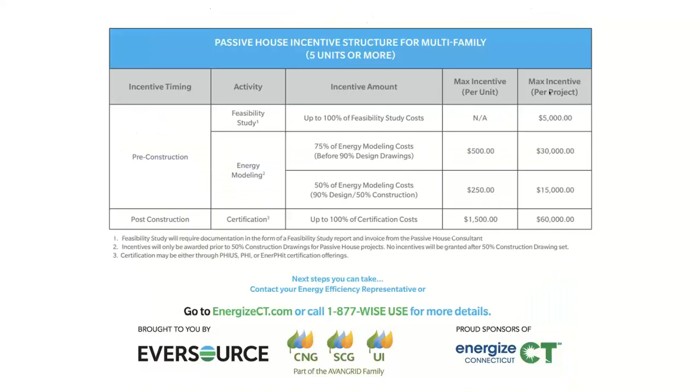Okay, thanks. Was there anything else you wanted to say about these slides, or is this sufficient? No, I think we're good. Yeah, it's all you. Okay.

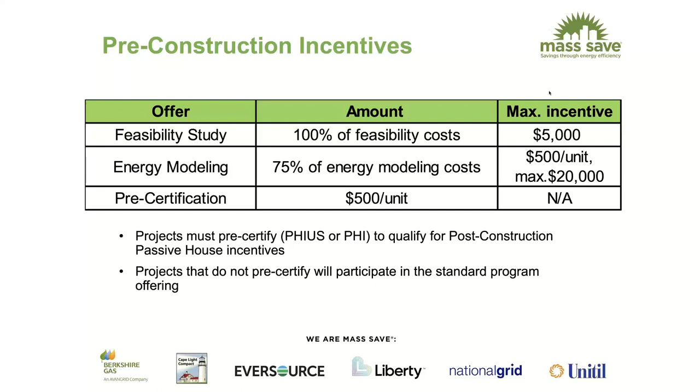All right, very good. I'll let this linger for just a second because these incentives, I have to say, these incentives have been incredible. They've really helped people who were maybe not ready to take the leap and they've covered a lot of the incremental soft cost. It's been a great help to us as practitioners.

So anyway, I'll introduce myself. My name is Michael Hindle, and I am the owner of Passive to Positive. I founded the company in 2010, and if you can see my cursor, this first little single family residence up here was a Living Building Challenge project here in Maryland, where I live. And ever since, we've been pushing forward with deep energy retrofits, new construction, single, multifamily, institutional.

We're a small company. I'm here with Christina Osman, and it's between us and a couple other people working with us. But we've managed to attract some really wonderful projects, and we feel very privileged to have done so. Christina, would you like to introduce yourself?

Hi everyone. So I'm originally from Germany, as you probably can tell from my accent, and growing up in Germany instilled a deep appreciation for environmental stewardship in me. And so that's how Michael and I connected on this deeper level of thinking about the earth and how to preserve it for future generations. And so I'm really happy that I'm working with him and that we are trying to make a positive impact on the planet.

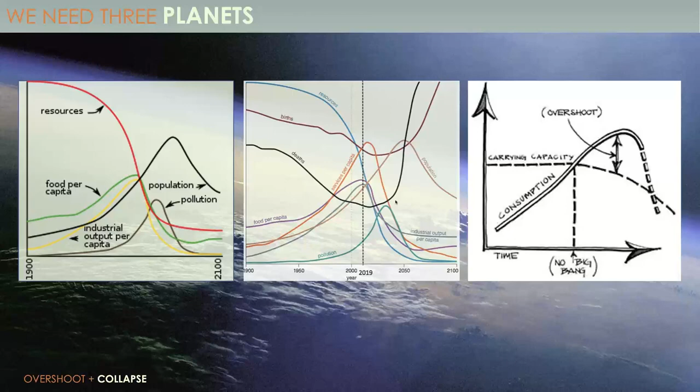Another way of saying this is that we have already overshot the carrying capacity of the planet. There are lots of ways to predict this and graph this, but basically since 1972, with the Limits to Growth from the Club of Rome, there are plenty of models that predict that here in the middle image, we are at 2019, the services per capita and the population are still rising, but so is pollution, and you can see the resources, the blue line in the center, just dropping precipitously. And at a certain point, we extract so many resources that our food per capita, our industrial output, everything collapses, and population collapses. So this is where we already are.

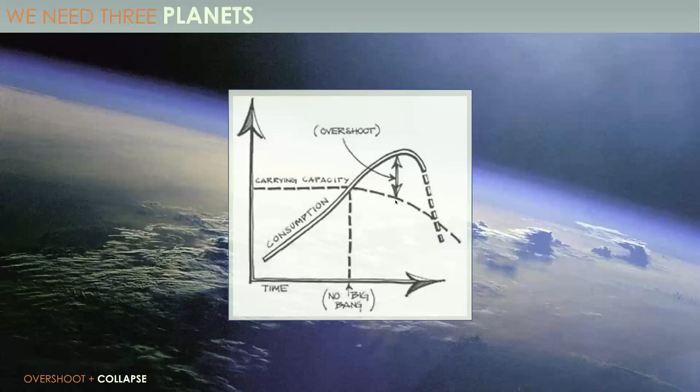The terrifying thing is that if we don't correct course soon, our overshoot can actually degrade regenerative systems that are the default mechanism of the planet to the point where we erode their capacity to rebuild. And if we do that, it would take hundreds, probably thousands, maybe tens of thousands of years for that system to recover and oscillate back into what we now know as the carrying capacity. There's no big bang that shows us that this is happening. It's already happening. In fact, we crossed that threshold in 1980 when I was 10 years old. We've already overshot the capacity of the planet since 1980 by 20%.

And for everyone to live the way we live in North America and Western Europe, you would need 3 planets. And in order to meet the projected population rise and material growth of the next 40 years, we would require 6 to 12 planets. And all the techno-optimism in the world will not compensate for the material limits of this closed loop system. That's a whole other conversation that we could have with Elon Musk and others. But the idea that you can transcend the material limits of a closed loop system like a planet with an atmosphere is just crazy. So we have one atmosphere, one biosphere, one set of physical resources, and each of us here today only has one life to do something about it.

Christina, would you like to talk about this? Sure. I mean, this sounds all doom and gloom. Obviously, we want to look at it also from an optimistic standpoint, of course.

And sustainability really means meeting present needs without impairing future generations' ability to thrive. But that's not good enough. We've done quite a bit of damage. And so really what we need to look at is a regenerative way of being. And that means it has to take into account repairing and regenerating damaged systems, looking at it from a really holistic standpoint.

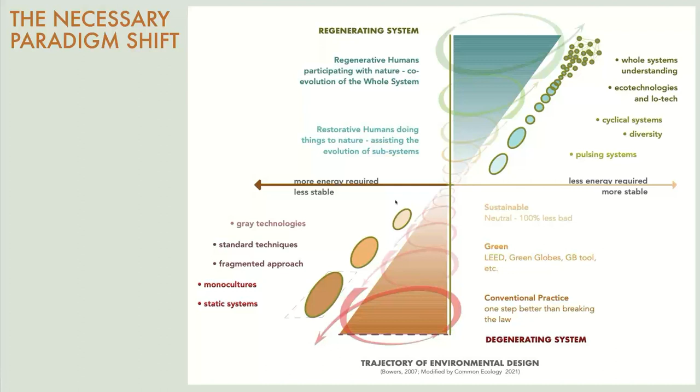So, Christina? Yep. So we want to be looking at a healing system, and really the main focus is conservation first. We want to do no harm and make sure that we reuse and restore the existing fabric, everything that's there already. We want to reuse and restore, and we want to repair the common resources that are available to us.

And it cannot happen without looking at people, at culture. I'm transplanted into a different culture, and so are very many other people, especially with climate change maybe challenging the cultures of different generations. I think it could have total impact. So we need to be aware of that. And we're all part of building design teams. We are the system, and we have to be the change.

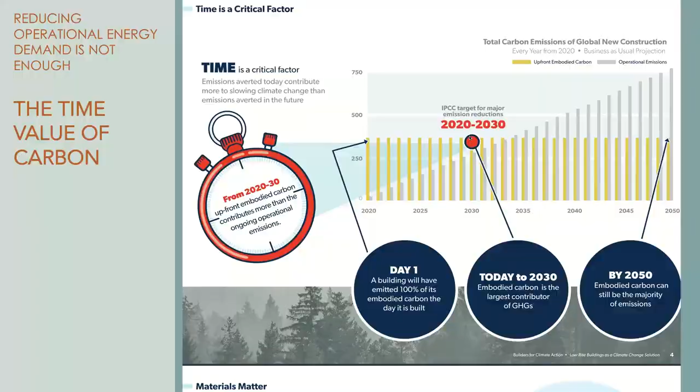But we now know from the scientists studying this that we have an earlier tipping point into runaway climate change than maybe we ever imagined. So if you look at, say, 2030, which is the Intergovernmental Panel on Climate Change target for major reductions, the embodied carbon is still the majority of the total carbon emitted by a building. So if we build now with carbon intensive materials, we are doing a grave disservice to the climate, even if we're zero energy. There are other charts that show a zero energy building with a greater carbon footprint because it uses carbon intensive materials.

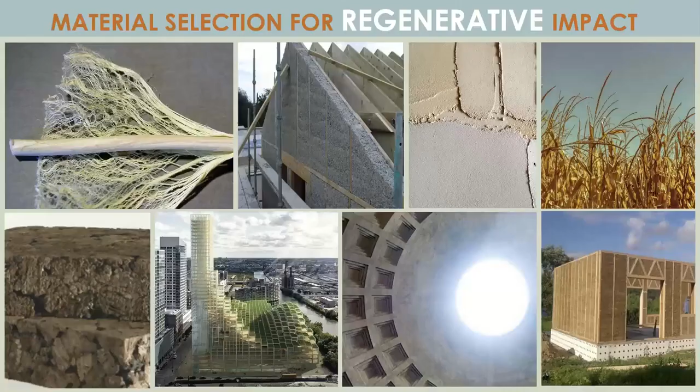They're also beautiful buildings and healthy buildings. So we have to choose materials for their regenerative impact. There are lots now, and there are also materials such as concrete alternatives which use a lot less carbon. So even if the material itself cannot be regenerative, it can dramatically reduce the harm you do, so that your renewable materials can tip the balance towards a climate positive impact.

So we're going to talk about a couple of projects here. The one on the left is North Avenue, workforce housing here in Baltimore. We're working on this with Tim McDonald and Onion Flats Architects. This is 7 different row homes with, I think, 18 units. It's affordable housing with first floor retail, and it was initially planned to be a tear down. Christina is going to talk about this balance between tearing down or building new in a moment.

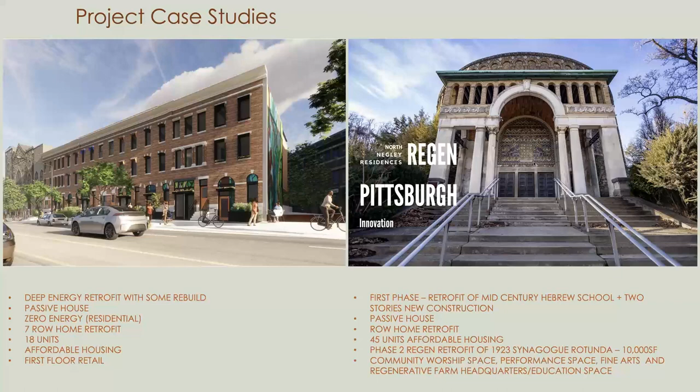The picture on the right is of a 1923 synagogue. It's absolutely gorgeous inside and out, but it's been seriously degraded, unfortunately. This is in Pittsburgh. We are deep energy retrofitting the adjacent Hebrew school and, as a second phase, this synagogue into a community center. It'll have 45 affordable housing units and a 10,000 square foot footprint community space, which will be worship space, performance space, etc. So I will let Christina start now talking about workforce housing.

Yes, so you see here a nice rendering of what it will look like once it's all completed. Basically, as Michael mentioned, there's an existing structure that's there currently—7 existing row homes in varying states of dilapidation. We thought it was really important to figure out if we can save some of the building structure and what the impacts are.

I mean, obviously our main goal is to do passive house. And with passive house, oftentimes the focus is so much on operational energy, right? That's the main goal. With that goal comes also better indoor air quality, resiliency, human comfort—just being in the space is much more nice. And then also, from acoustical values, it's so much quieter, especially in a busy, bustling street like here in Baltimore.

So those considerations are all on one side, but on the other side, you want to also look at: if you put passive house envelopes on projects, oftentimes that is achieved through high embodied carbon impact, in terms of adding so many materials, a lot of foam-based materials. So in our practice, we're really trying to figure out a responsible way of achieving passive house.

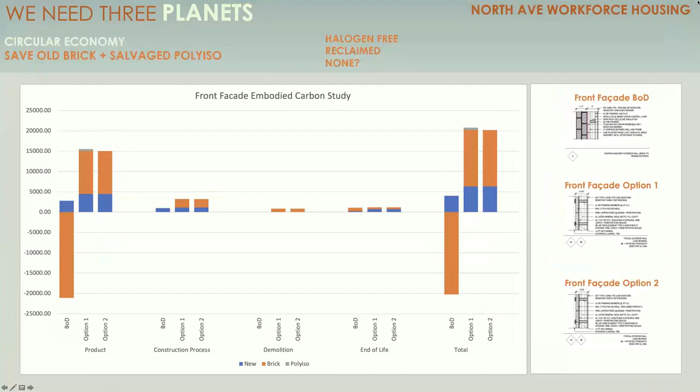These charts, we have several, and they're maybe not the most compelling part of the presentation, so we're not going to spend too much time on them. But it's important to see that there are different phases in the operation of the material. On the left-hand side, your first phase is the extraction of resources, processing, manufacture and transport. The second phase is construction. The third phase actually includes maintenance and operation. And I also included demolition because I think that needs to be considered as well.

That's something I added because I think it's important. If you have a site that already has structures on your lot, you can't just ignore that. So you have a responsibility, and you should, in my opinion, take a carbon penalty if you just tear them down and start from scratch. That's why we added that specific piece here. It's minimal, but yeah.

Can you describe to us what we're looking at here? Yes, of course. So basically, you're looking at the orange color, which is representing the masonry.

We have a baseline here at 0, and then some negative and positive values. So the basis of design shows the big amount of masonry that's already there, compared to the blue amount of the wall, which is the backup wall to make our structure now passive house. By combining the existing structure with the additional new construction, we are achieving an R value of R26.

I also wanted to mention that this was fairly conservative, because this was all modeled in Athena taking into account today's construction methods. At the time when these row homes were constructed, it probably was much more energy intensive to create these bricks, so my negative might be even deeper realistically.

Correct me if I'm wrong, Christina, but we're not actually claiming credit for that. No, we're not claiming credit.

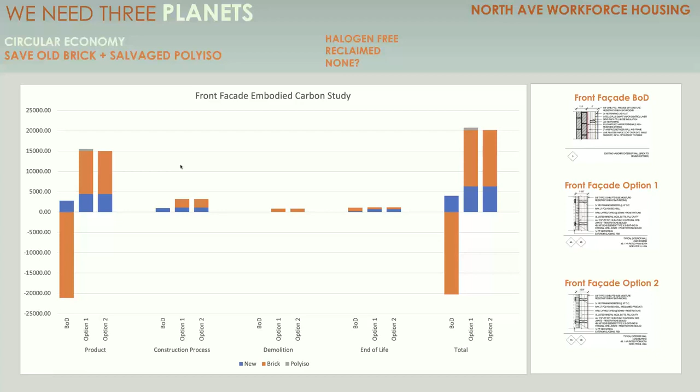I just want to give you a perspective of what it means in terms of having impact, how much carbon is already emitted for that material. We have the responsibility to do something with it, and if we extend the life of it, that makes total sense. So that's basically our message.

I also wanted to mention my passion is really in Living Building Challenge, healthy materials, clear labels, the red list. In this case there are a few options for red list-free polyiso you could use, so if you needed to include it in your project you could still get Living Building Challenge certification - these would be halogen-free polyiso products. But still it would make more sense to use used materials if you can. That's definitely a message I wanted to share. Yes, because I share this passion as well.

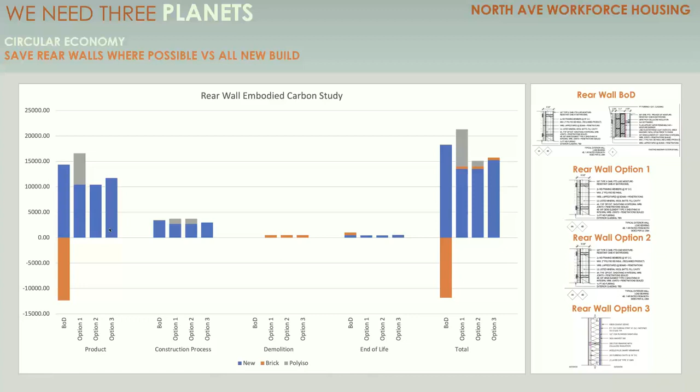So we're not trying to tell you empirical values. These are more like considerations that should really go into decision making. And so that's something that we just wanted to share, thinking about a project in different ways. Christina, I think we might want to skip the party wall one, in the interest of time. Sure. But as Christina mentioned, we're trying to show the big swings, because it's not acceptable to do marginally less carbon intensive projects. We have to push them hard. So if we can see ways to make big differences, that's what we're focusing on.

Okay, so this next project is North Negley Avenue in Pittsburgh. This is the rendering of its eventual self. But it does not include the greenhouse from the salvage windows or the regenerative farm plot in the front yard. That comes in the next phase with the synagogue rehab. In any case, we want to remember that biogenic carbon actually comes first in the form of trees, which keep us cool, reduce heat islands, sequester carbon, and can eventually provide renewable materials. But we have to protect the forest from which that material comes.

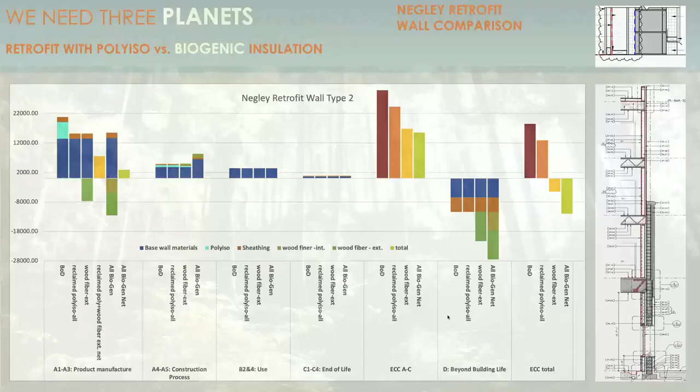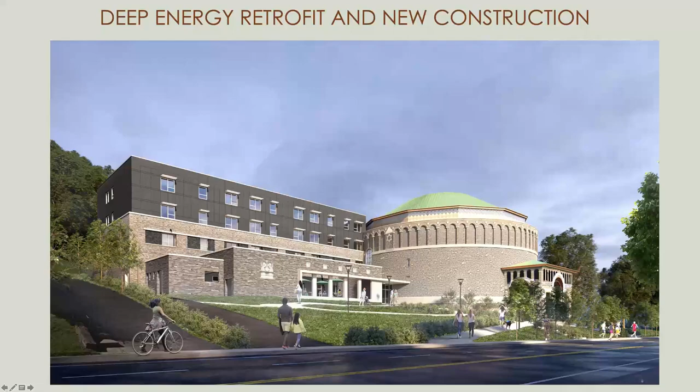In any case, this study is of the retrofit wall, and again, we have all of the cycles. We have the product manufacture, construction process, use, end of life, and eventually beyond building life, and the net total. Those are the different things shown on the chart. The blue wall is this backup frame wall, which is pretty steady and consistent throughout.

But you can see the bright teal blue is polyisocyanurate insulation, which we were required for a couple of different reasons to use. The sheathing is the orange layer. However, we again were able to convince the team to actually save money by using reclaimed polyiso. And so you can see that you eliminate that bright teal blue bar on the top left here.

In the next scenario, after the reclaimed, we decided to try to quantify the carbon impact of using wood fiber instead of polyiso. And it turns out that wood fiber in its manufacture phase actually has a negative carbon impact. In other words, it's been pulling carbon out of the atmosphere for 40, 50 years. And the impact of processing and producing it does not offset the sunk carbon. So it's a negative value here, the green.

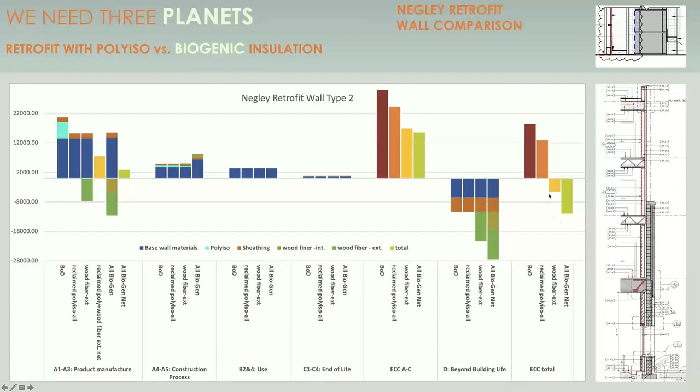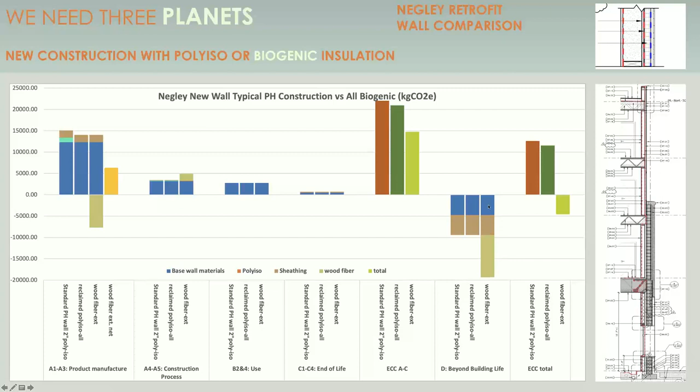However, on the new construction wall, we were able to use wood fiber insulation, and you can see that this beigey green color is the wood fiber insulation. Our net carbon footprint of the material manufacture of these walls is the yellow bar here. There's added carbon for construction and maintenance. But then ultimately, these are our totals, okay? But if you include the circular economy we referred to earlier, the negative carbon storing potential of these materials being reclaimed gets us into the carbon negative realm.

Now that's a lot of talk, and it's a lot of modeling with some pretty inexact tools. I think Christine and I were both a little surprised at how inexact and ineffective these tools could be. So we did a lot of breaking things out to say, well, Athena tells us this, but if we remove that element, what's the numerical value? Could we supplant it with something else? Athena was not flexible enough to do what we needed to do. So I would not consider Athena really that useful a tool other than as part of a process.

But there are other tools like EC3, where you have to have so much data on the materials and the quantities of materials. You basically have to be working from a bill of materials and the total quantities to get a real number. So somewhere in between those two, there needs to be a tool that gives us some more useful values early in the design phase. And we also want this to be for people just making simple, easy decisions, right?

Something that's simple, but you don't have to spend much time, because this is something that we're adding to our practice, but you're not being asked to do this. So it needs to also make sense, to do it fast and efficiently. Yeah, and for years we've been doing foam-free passive houses, and we were doing it based on intuition. We were trying to use biogenic insulation materials or recycled ones like cellulose whenever possible. And that was just our gut feeling that it was the better thing to do. Now that we're doing the analysis, we're finding that that intuition is generally supported.

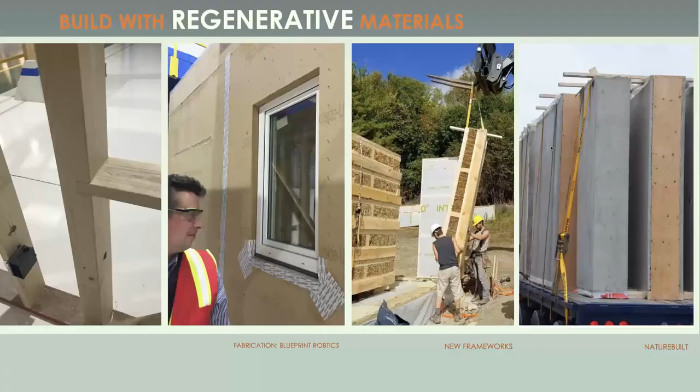But panelization itself, or prefab itself, is really not the solution. We need it to be focused on renewable materials. So the gold standard is to use a rapid growth cycle biogenic source. If you're growing hemp, it grows really fast, pulls carbon down aggressively. If you're growing a tree that is sustainably harvested, it sequesters carbon for 30 to 80 years, and then you cut it down. We don't have 30 to 80 years. So it's better to use a carbon storing material, but it should be regenerative materials that are a rapid growth cycle, if at all possible, in any instance.

Okay, there are a couple other things we want to talk about briefly, and Keegan, what is our time limit here? How much time do you think we have right now? Because we have a couple more things.

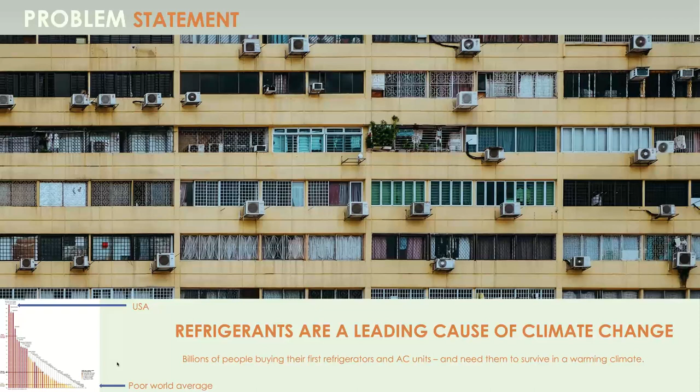If we do everything right, but don't address refrigerants, we're still cooked. So we have to find a way out of this trap of refrigerants. We're going to show you a project in a moment. This is a wonderful project using mass timber, but this is the VRF system. That's a lot of refrigerant. Can you save the planet by using high refrigerant systems? I would posit that we cannot.

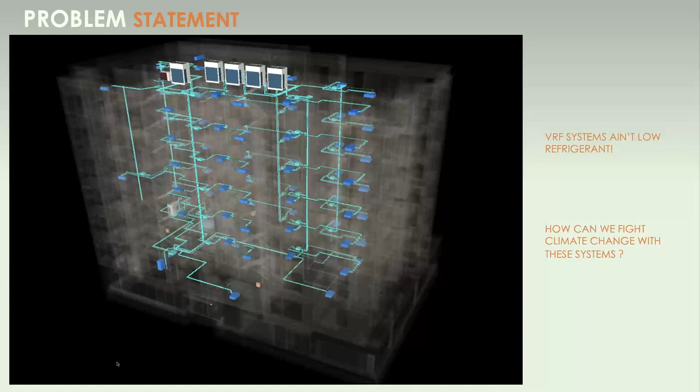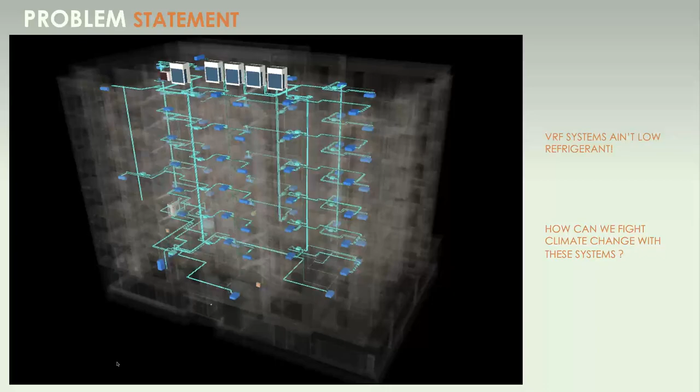And I do so respectfully and with humility, because I know there may be people a lot smarter than I am who could say, actually, on balance, you can. But I'm going to say, since we have to do everything right, we should try to eliminate refrigerant to whatever degree possible.

This Ephoca company, it's relatively new to us, but they have these through-wall PTAC things, which are airtight and very efficient. And they have this VHP, which sits in a soffit, say above a kitchen, and delivers your heating, cooling, ventilation, and dehumidification for an apartment in one unit.

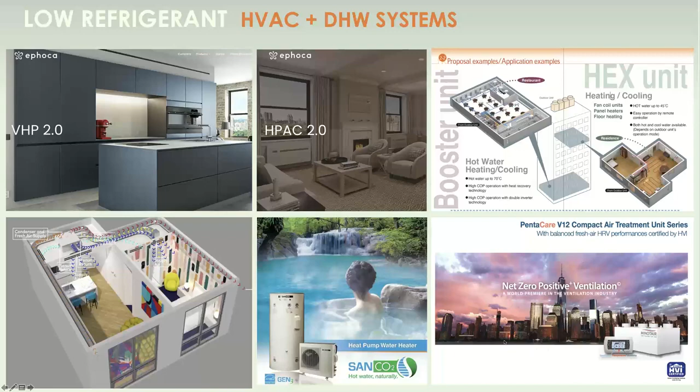We all have probably heard about Minotair down in the bottom right, and Sanden. Sanden is CO2 refrigerant. Minotair has a tiny bit of refrigerant that's packaged in the unit. So basically, we have an option of choosing not just efficiency, but efficiency plus the lowest carbon footprint we can across both assemblies and systems.

All right, the last thing I want to mention, and Christina, please feel free to jump in if you have anything to add to this, we're doing a bunch of projects in Washington, D.C., right down here, Barry Farm. We're completely redeveloping. We're not doing it, of course. POA is, and we're the consultant. A total neighborhood redevelopment, all to Passive House standards, all with solar and backup storage.

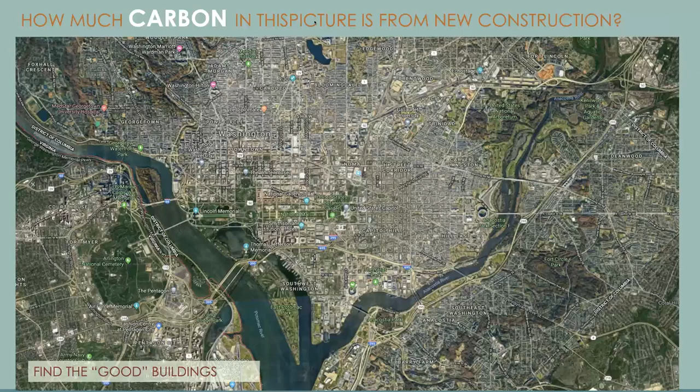It's pretty exciting stuff. But if you look at Washington, D.C., and imagine the plume of carbon dioxide being emitted from buildings in this city, how much of that carbon in this picture is coming from new construction? If we build every single new building to carbon negative standards, Passive House standards, net zero standards, what have we accomplished? Well, we've accomplished a lot, but not enough. You could find the good buildings on this map and there would be a tiny, tiny fraction.

So deep energy retrofits are not optional. They are complicated, but they are not optional. We're going to show you several; both of those projects we showed you are deep energy retrofits. Now, if you look at these charts by Siegel and Strain Architects, they're a big part of this movement, the carbon-sensitive architecture movement.

The chart on the left is emissions sources in millions of tons of carbon emissions equivalent. Operating emissions of new construction is this tiny little bar on the left because we make buildings pretty efficiently now. Embodied emissions of new construction is pretty low, like we're getting better. But the operating emissions of existing buildings dwarfs both of them.

That tells us, if we go over to the CO2 emissions by project type, you can see that large, heavy buildings have a very large carbon footprint for construction. Small, light buildings have a moderate, but still present carbon footprint for construction. But on the right, renovations have the lowest of all.

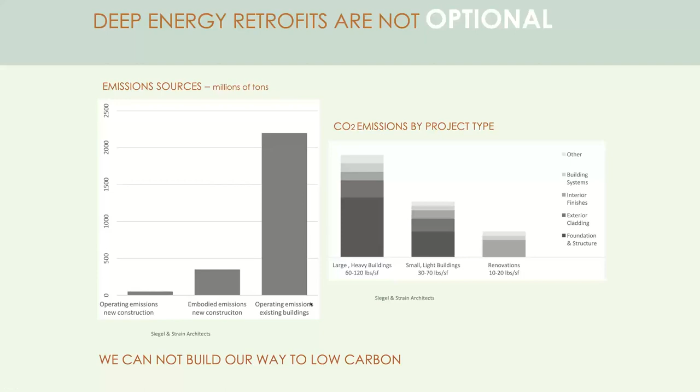What that is telling us is that our problem, the operating emissions over here on the left, is aligning perfectly with the best opportunity. So operating emissions can be dramatically reduced by the lowest carbon footprint kind of project. So this intervention is the lowest carbon footprint and it achieves the greatest result. So we cannot build our way out of climate change with sexy net zero buildings. We have to do retrofits.

Now, thanks to Adam Cohen for sharing this with his integrated project delivery course. This is a chart that just shows time from left to right on the bottom and effectiveness and cost vertically on the left. The blue line is the effectiveness of change, and the green line is the cost of change. And I think we've all heard this. I apologize again for preaching to the choir, but usually the decision-making process in design-bid-build projects is backwards.

Here in this green zone, we would have the greatest effect of making design changes for the lowest cost. But at some point, those lines cross and it becomes more expensive and less effective to make change. And this pink bar is basically when we usually start doing that. And the orange is what we're doing on several projects right now, chasing value engineering savings where it's the most expensive and the least effective to make design changes. So again, this is just the same passive house argument for integrated design teams and integrated project delivery.

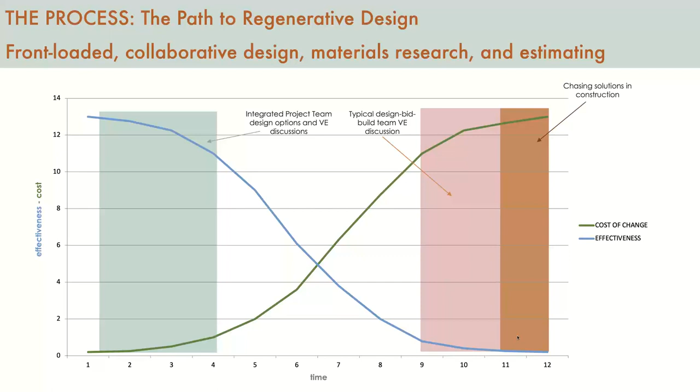Okay, Christina, you want to talk a little bit now? So these are your slides, though. I'm obviously not a white male architect, but I'm an architect.

We hear from the architects all the time, and I'm not bad-mouthing architects. I'm married to one. Yes, we know that. I'm one of them too. But how often have we heard, you don't understand, my clients aren't asking for this, so I'm powerless to do anything. And my answer to that is wrong. You are not powerless. You can play a role in educating and changing the conversation.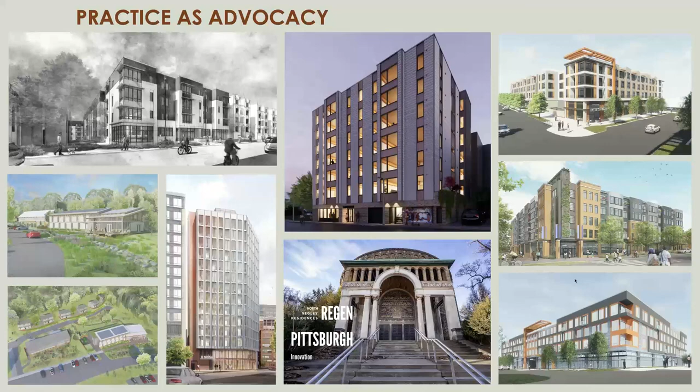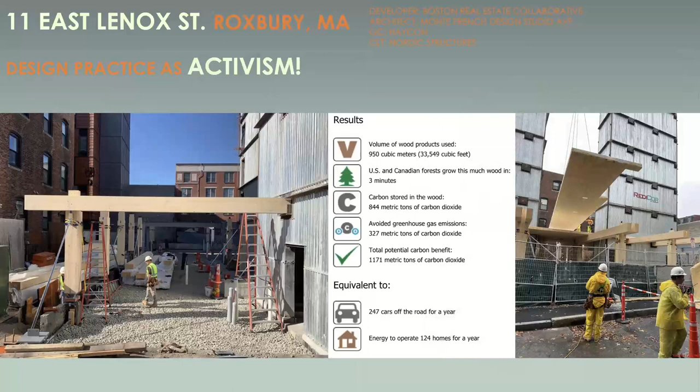So here are some slides of 11 East Lenox Street in Boston. This is under construction—it's a mass timber structure, 7 stories of apartments. The podium is mass timber, everything is mass timber. It's been a wonderful project. Monte French Design Studio is really great, Haycon the builder is great, Nordic Structures—everyone's been great. That has been a real reward to work on. We also just achieved pre-certification for the project, so we definitely hit a big milestone.

Did you want to talk about this stuff, Christina? Yes—so here you see the first cross-laminated timber beam going into place. We wanted to share a little of the sustainability story here. Of course these aren't total life cycle analysis claims, but they show a level of impact. When you look at the volume of wood being used, how much the forests grow back in 3 minutes, the carbon stored in the wood, and avoided greenhouse gas emissions, the total potential carbon benefit compared to non-wood structures is significant.

Christina, you pointed out this is not a whole building assessment—we didn't analyze the RediCore concrete stair towers or the cladding system. We assume everyone in every part of the industry has to aggressively evaluate what they have control over; we don't have control over many of those decisions. We advocate even outside our lane, but definitely for things inside our lane. We don't want to take too much credit on these projects because this team was already way ahead—Haycon Construction, Boston Real Estate Collaborative, Monte French Design Studio, BLW Engineers, H&O Structural—everyone was on board.

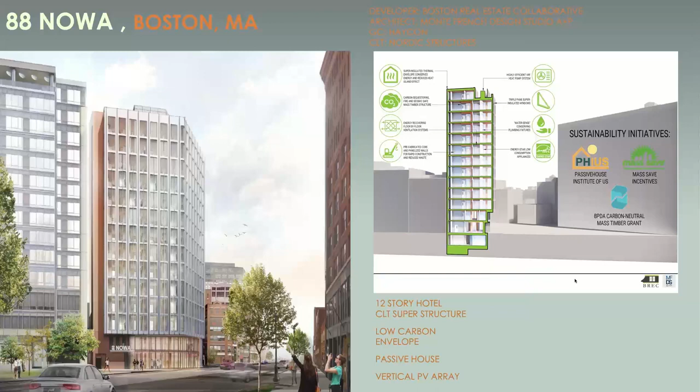Now we're delivering the model results for a 12-story hotel, which will also be mass timber—a low carbon envelope passive house. We believe we can do this with low carbon systems as described earlier. We've also just begun working with the Smithsonian Institute on a village of housing. It won't look like those little cottages, but that's the rendering we were given.

And then ultimately, we'll be building a lodge here for housing of scientists coming to do environmental research down here in Maryland. So that's an exciting project. We hope to have that be a carbon negative project with a resiliency microgrid.

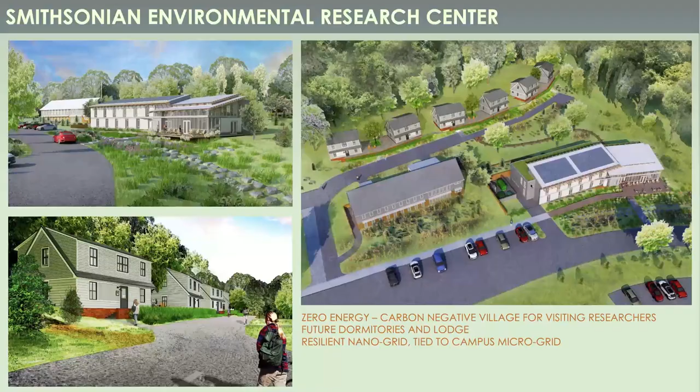This is a great team, Somerset Development, Eric Colbert and Associates Architects. Steangl Engineering is on this one. They're also on the 1600 on North Ave Workforce Housing Project. This is a CLT podium building, the first of 2 phases. The second phase is a 7-story mass timber tower.

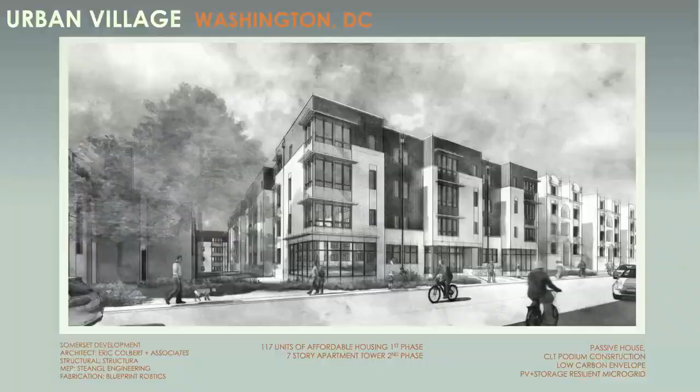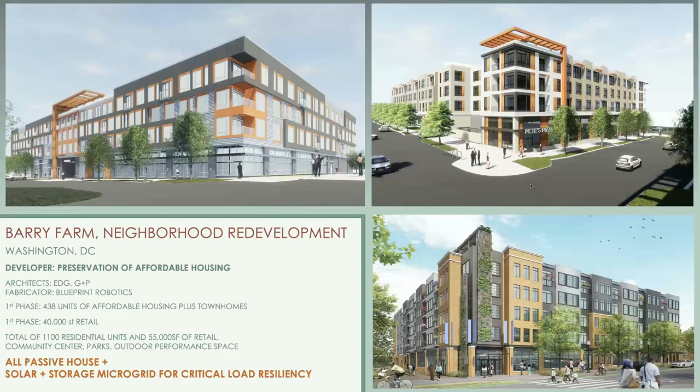And this is Barry Farm. POAH from up in your neck of the woods is redeveloping this. Julie Klump has been just a fantastic person to work with, as Deanna Savage. And so this entire neighborhood of 1,100 residential units and 55,000 square feet of retail space will be passive house.

So we just wanted to conclude with that to say we have all of the solutions that we need to achieve carbon drawdown and restore the balance in the climate and in the level of toxicity we pump into the world. So we have all the solutions. We just have to choose them. And I guess this is our invitation to please do anything you can and join with us and educate us with your successes on how we can accomplish these goals.

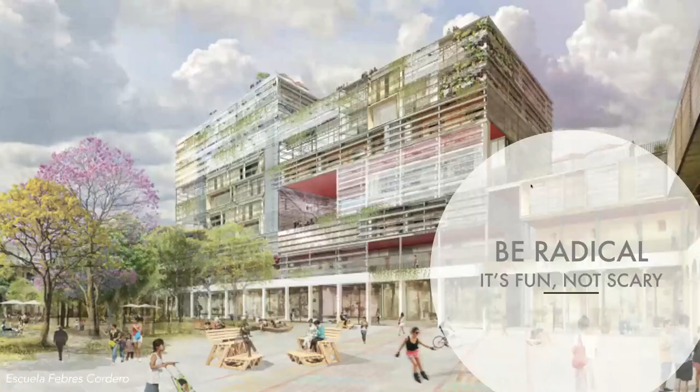It's not scary. It's really fun once you get into it. And so be radical, push harder than you think you can. It's not really a risk. We've never lost a job because of this. We know how to compromise, but lean in. It's fun. Christina, anything else you wanted to say?

Yes, I wanted to just make sure to thank everyone, and we want to end on a really, really positive note. Everybody, you can make an impact, you have a choice, and we want you to join us in this movement to leave the world a better place for future generations.

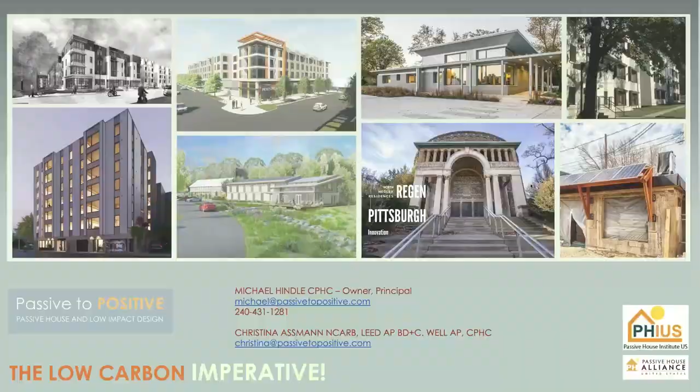Thank you very much. And I can stop sharing now, I think, and perhaps we can take questions.